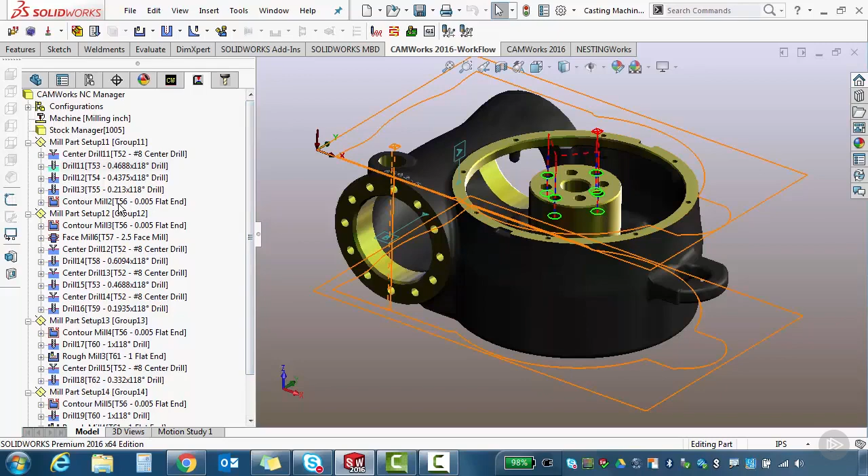Okay, what we're going to take a look at next is contour mill. And if we look at this, we have a contour mill that wants to go around the part, and we're currently using a 5/1000 end mill. And so we want to make a change to that just because we want to adjust how the contour is going to work. And this would be similar to if we had a rough mill, which we'll take a look at here in a little bit.

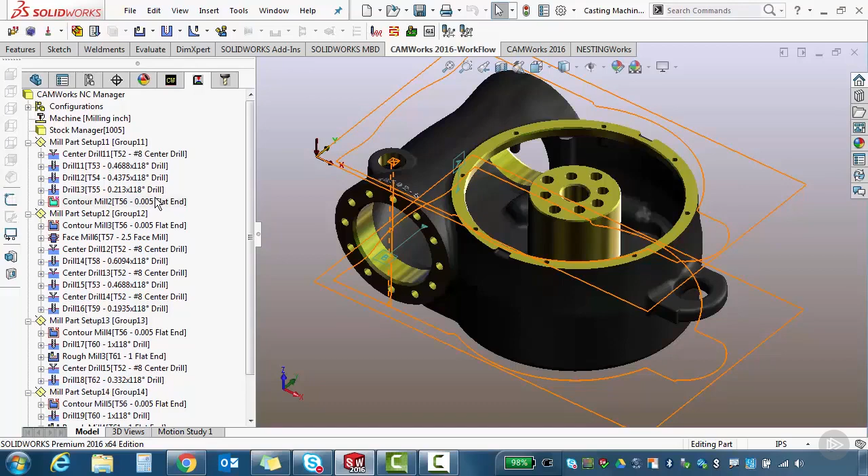Contour mills are considered finish mills or finish passes. Rough mills are just roughing. It just blanks it out and leaves some stock generally. So we're going to edit this contour mill and just take a look at it so we can understand a little bit more about it. Again, like before, right click and select edit definition, or double click on the feature to get the dialog box to open.

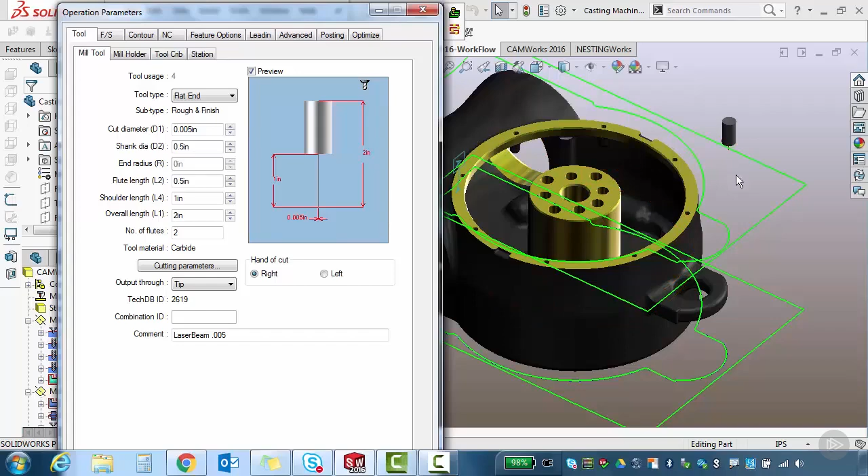Okay, with the dialog box open, we're going to start by looking at the tool. And one of the cool things about this is when you go to a tool and I come out here on the screen, you can actually see what it's going to look like. Now, the 5/1000 end mill is probably not the best tool for this scenario, so we're going to pick a tool that's a little bit bigger. And where we do that is we go to our tool crib, and then we have the ability to interrogate or select any of the tools in our tree.

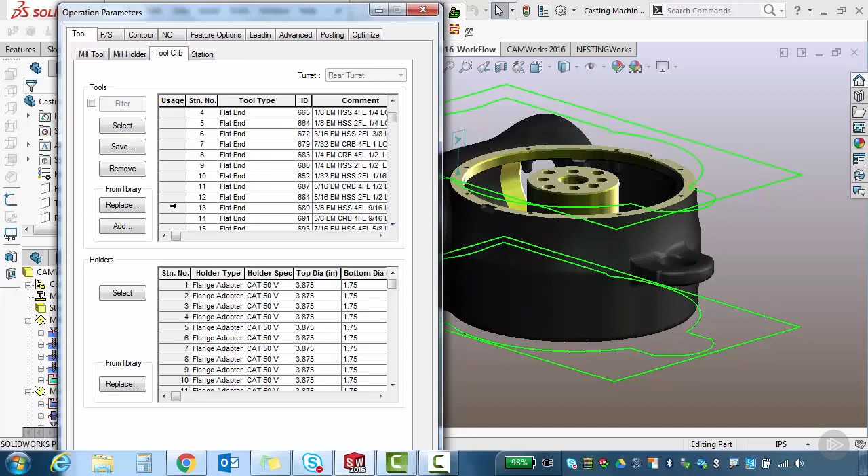Now again, this is standard tooling by default, and we're just going to try a 3/8 end mill 4 flute. So if I come down here, you can see I get a preview of what it's going to look like. I get all the diameters and dimensions that go with it, and where those numbers end up are right here. So you can see you have radius, tip, high-speed steel. If you wanted a carbide 3/8, I can select the carbide, which is CRB.

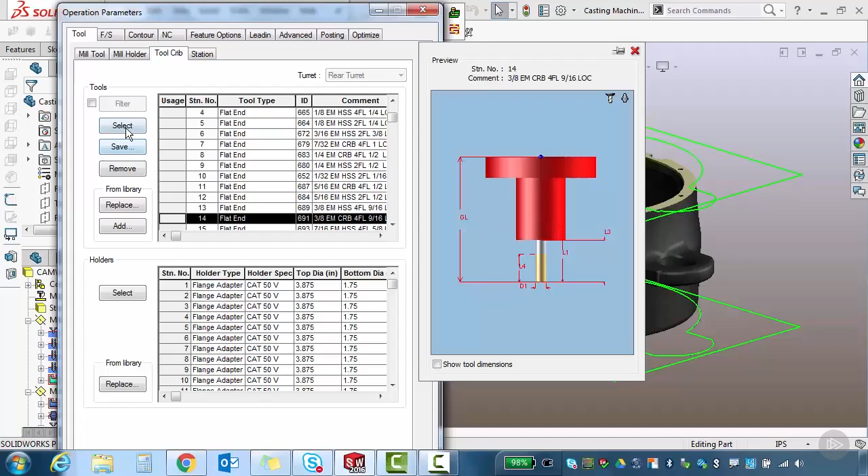Once I have this row selected, I'll just hit select, and it's going to ask if I want to update the holder also. So if I'm using collets, of course I want to update it because the shank is from 5/1000 to 3/8. So we'll just hit yes. And now we have a 3/8 tool. So if I hover out here on the screen, I have a tool that follows my mouse and pointer around.

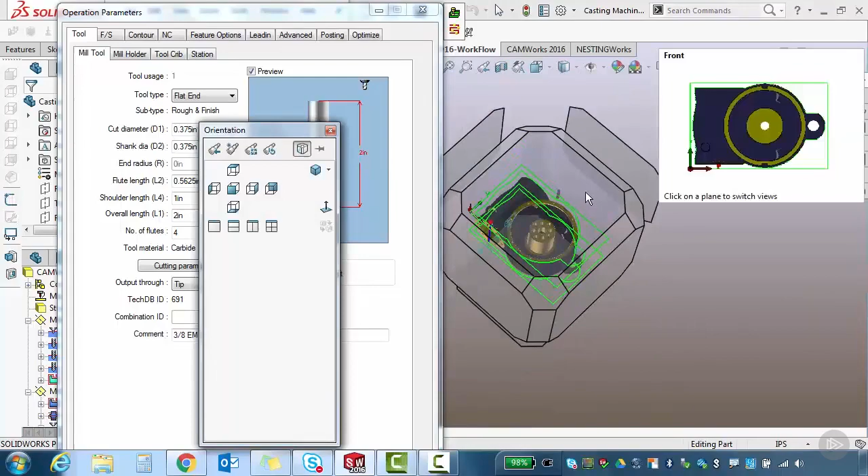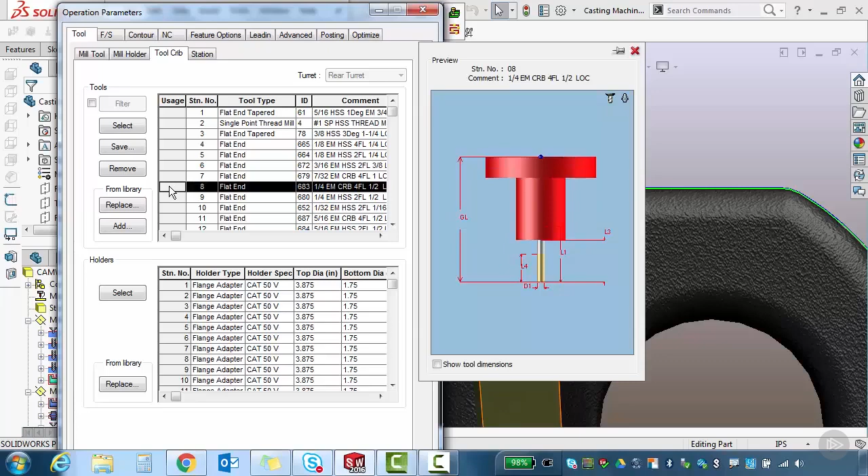And what this allows me to do is if I look at the CAMWorks viewports, I have the ability to come in and see if I use a 3/8 end mill, how am I going to finish that radius? Well, it looks like it may not finish quite right, so 3/8 may be a little too big for me. So we'll go back to the tool crib, and we're going to select a 1/4 inch carbide. So we'll just highlight that, hit select, update the holder, and now if I come and look at it, you can see that's a better fit for finishing around my part.

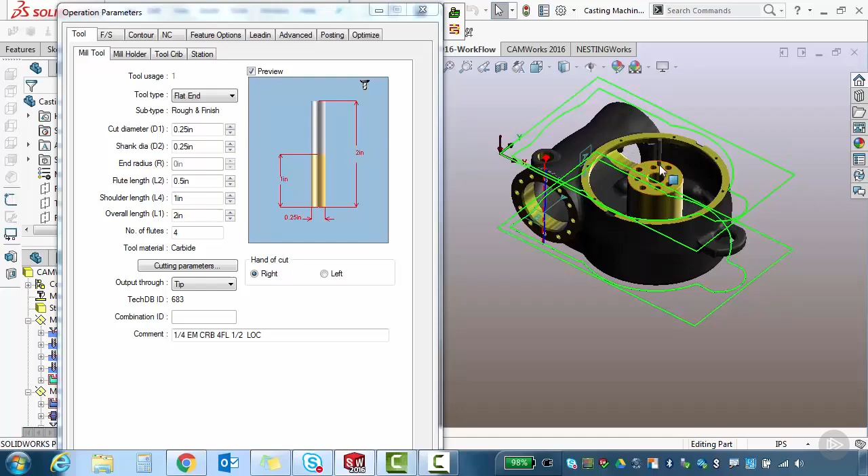I use this a lot when I'm working with tight tolerances and machining to understand how the tool paths are going to be affected based on the tool that I pick. And it's really nice because all of the interaction and zoom in, zoom out is just standard SolidWorks. So with the 1/4 inch tool there, we're going to go ahead and go to our feeds and speeds. And again, these feeds and speeds look very similar to the drill. The one thing that you will notice is different is the Z feed rate and the lead-in feed rate.

Now, let's say I want 5/1000 per tooth, and then I want the spindle speed to be 6,500. If I type in 6,500, you'll see that with 5/1000 per tooth on the carbide end mill we have, which is a 4 flute, it's going to take the 4 flutes times 5/1000 per flute per revolution and then give us 130 inches a minute. Now, what a lot of people get into here is they don't really look at the Z feed rate or the lead-in feed rate.

And this sometimes gets people into trouble because this is how fast the machine is going to feed into the part once it goes to feed mode. Now, you may not want to take a full feed-in rate into your part if you're doing plunging. So one of the things you can do here is you can say, well, I want to feed into the part in Z at 50% of my XY feed rate. And this gives me a slow entry into the part.

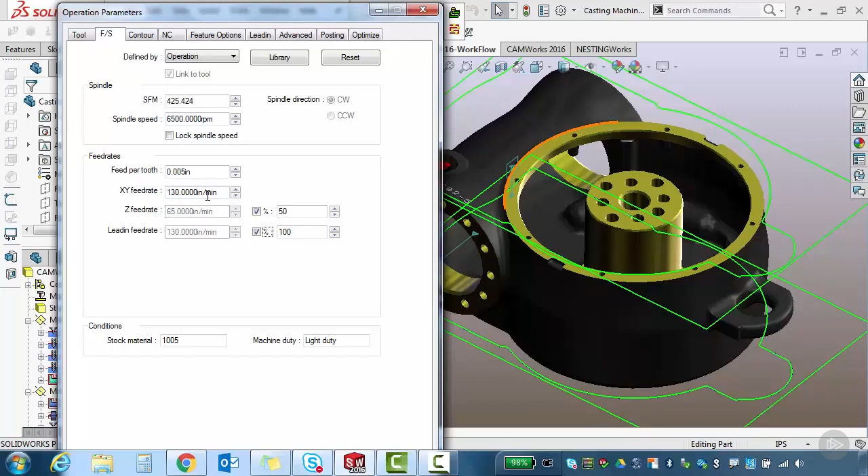And then you may also want to say, well, when I start cutting, I want to start at 25%. So that way it'll come down, it'll feed in at 50%, and then before it just takes off at 130, it'll actually start cutting and create that path at 25%. And again, when we talk about the technology database, this is all stuff that we'll come up with later, but I just wanted to show that because a lot of new beginners with CAMWorks ignore these two rows here,

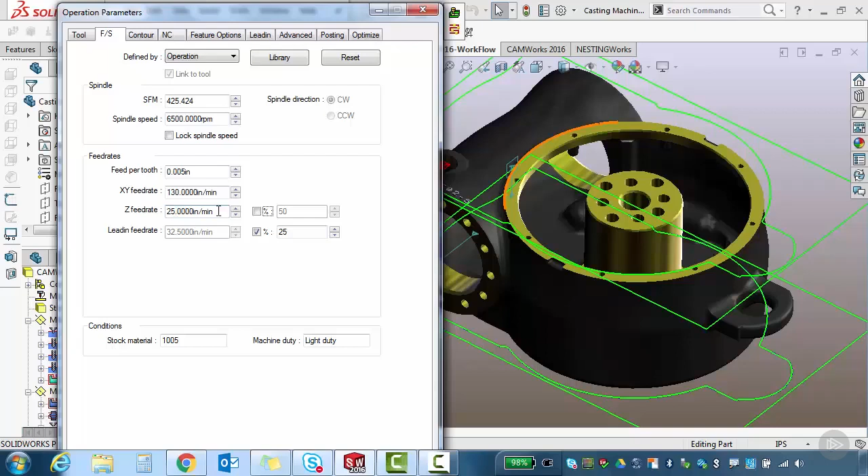and once they ignore them, they can't figure out why the end mill jams into the part, and they end up trying to edit the feeds at the machine, when really all it is is just changing these numbers here. And you do have the ability to check or uncheck if you don't want 50%, but you know an actual number of inches per minute you want to run. Like let's say I want it to be 25 inches a minute. You can just type it in there and ignore the percentages.